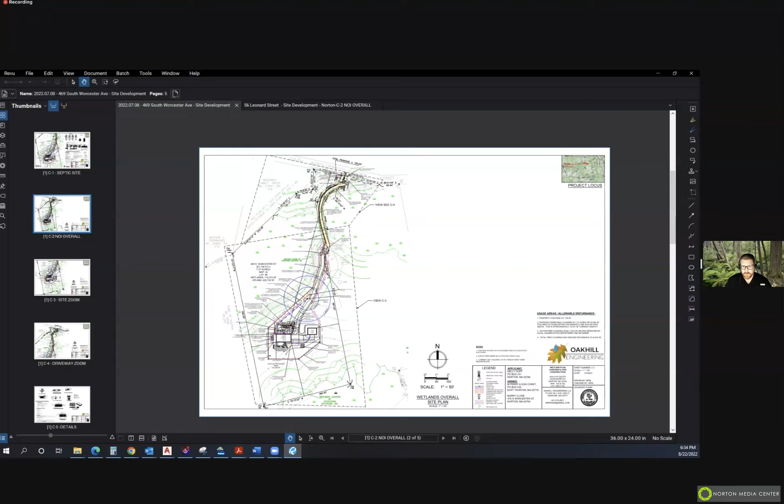Let me just comment, you certainly can participate as a member of the public. Oh yeah, definitely. So I think the idea of recusing from final votes is appropriate, but he has rights as a town citizen and member of the public. Right, so the proper procedure is to turn off your screen so you're not part of it as one of the members from the Conservation Commission voting. That's kind of what we've been directed to ask people on the board to do when they want to recuse themselves, to just turn off their screen. That's fine, I'm okay with that. I'll just listen in the background for when it's time to join the next one. Okay, all right, thank you. Thanks. Yep.

All right, John, I will share my screen. Yeah, you should have rights to do so. Okay, all right, can everyone see it?

Yes. All right, awesome. So this current property, it's approximately 7 acres. It was recently subdivided in May of 2022. The other property is 475 South Worcester. So let me zoom in so you guys can just see the site overview. So this parcel right here is 475.

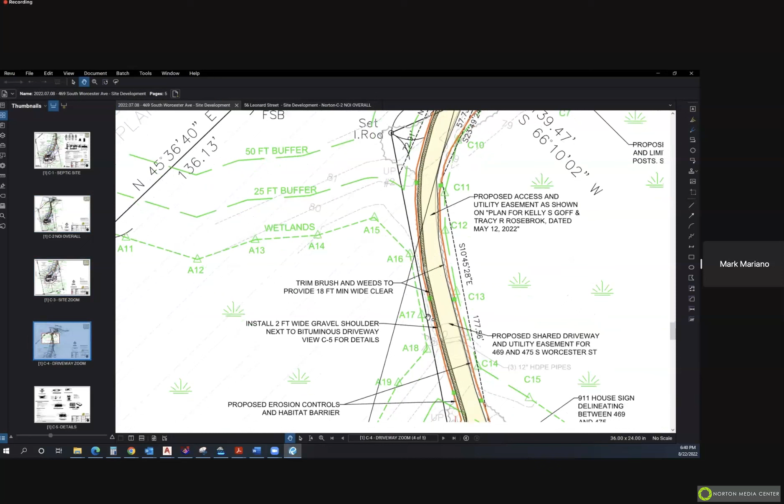Okay, and second, can you zoom in on the impacts within the 25-foot buffer that you want to do? Yes, okay, let me go to driveway zoom. All right, so the impact is this little edging right here. And we chose this side because this side was further away from the wetlands opposed to this side.

Right, I don't have any records of the original filing. I think it occurred, I want to say pre-95. Does that sound about right? Yeah, I can definitely look through other records.

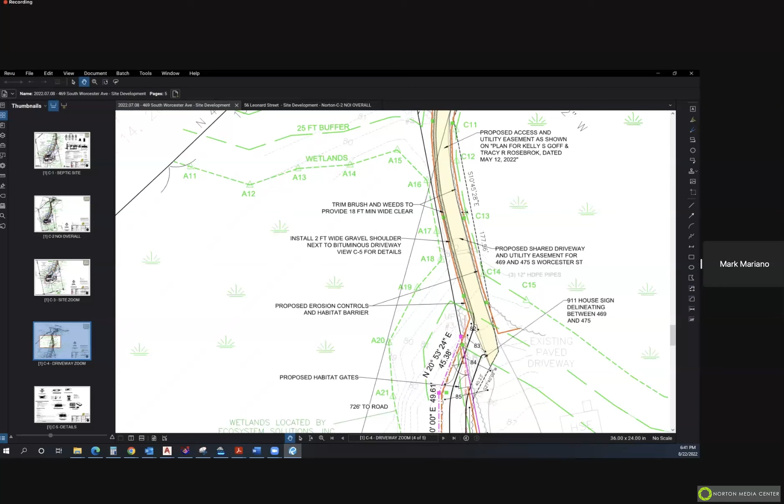Do you think that the three pipes there is sufficient, or do you need to extend the driveway in either direction further? So we have three culvert pipes that are right here. I believe I don't see the necessary need to alter or change those in any way. They are far enough out where we're not going to be impacting or filling over them. And I believe, like I said, I don't have the original filing, but likely they were just put in to hydraulically connect it, to keep that hydraulic connection. But yeah, I was just wondering if those pipes needed to be upgraded, or if the extension was going on either side further, that it would compromise those pipes.

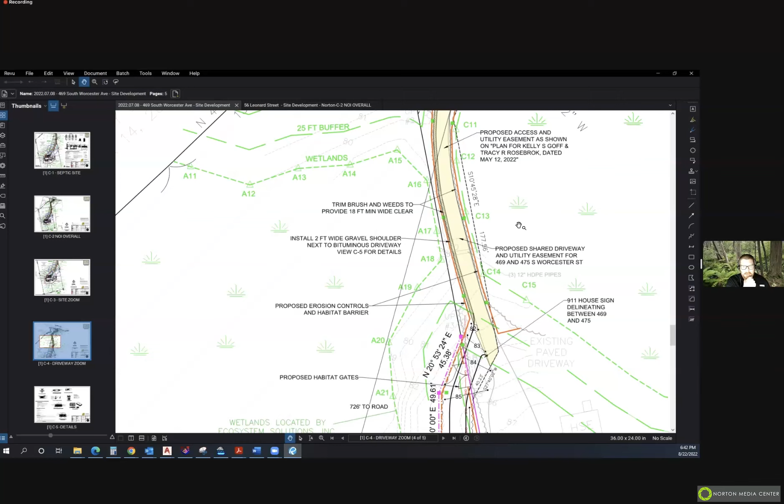So that was one of my other questions. And you were talking about the markers that are going in. Yeah, so those are going to be flush with the ground. Is that the plan? The stone markers?

No, I'm proposing iron rods. They'll be easier to find in the end, and they'll be easier to find with a metal detector. And that's a requirement from Natural Heritage? Is that what they requested? So they never actually requested it, but the last project I did two months ago, they did request it on that one. So I...

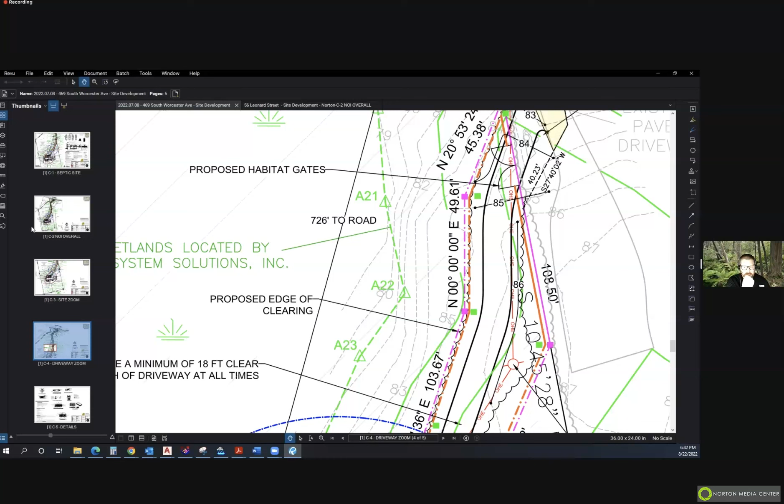Figured that was a similar thing they'd be looking for here. So for the commission, I think we'd also want a visual post at each of these markers. Oh yes, so the green post is your standard post, and the iron rod is just to...

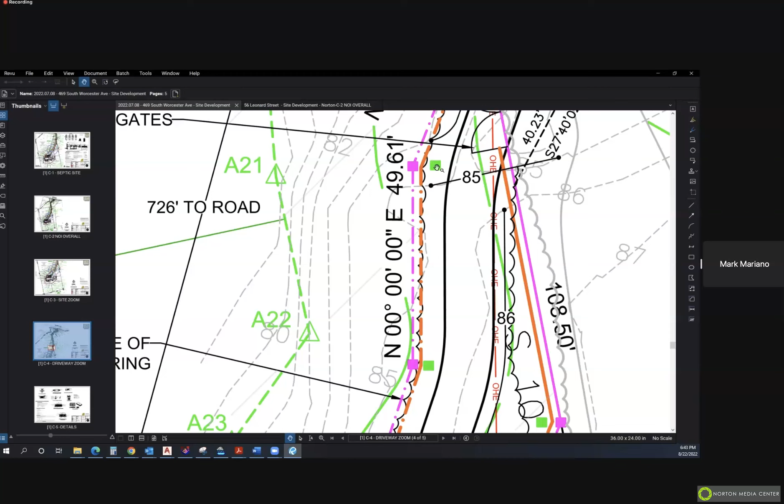Locate the limit of what Natural Heritage has approved for clearing. We still have your post, which is probably about 3 feet off of what the actual allowable clearing is inside of that, so you're at like the 28, 29 foot setback from the wetlands.

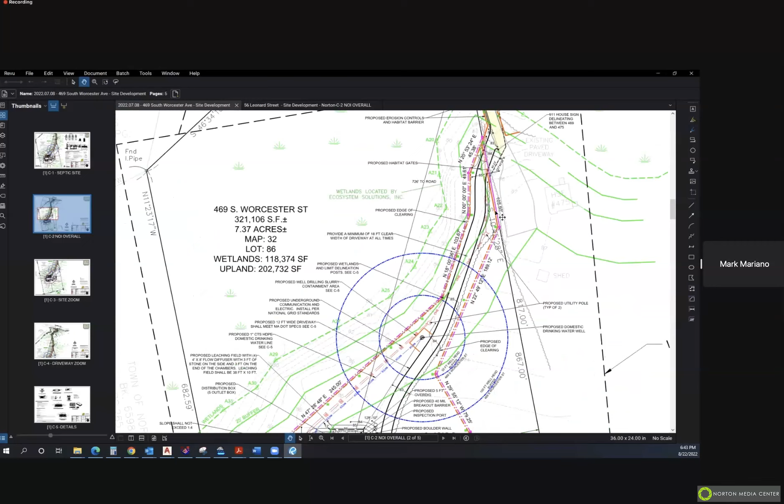So I have approximately 1, 2, 3, 4, 5, 6, 7... let me go back to this. 6, 7, 8, 9, 10, 11, 12, 13, 14, 15, 16, 17, 18. I have 18 posts with signs.

Yeah, and I have no issues with the delineation either. So EcoSystem Solutions, I didn't want to change any of their flags when I was out there.

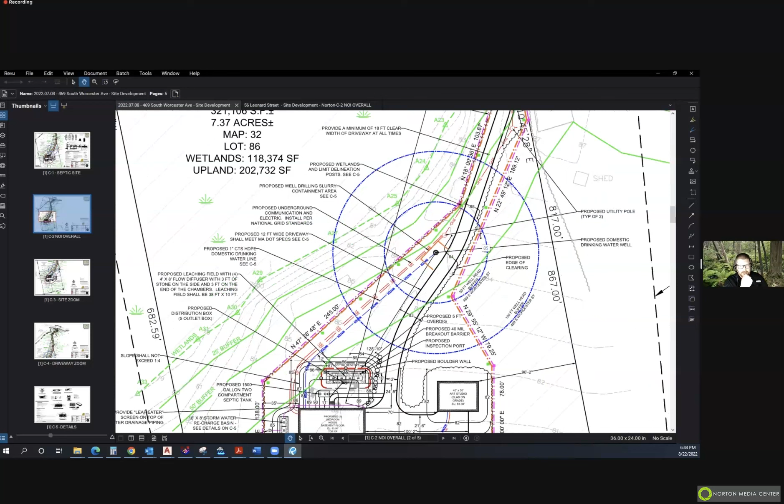So the last question I have is, are there any good stewardship practices the landowner wants to do with stormwater management, or how's the runoff going to work for the new impervious surface going in here? I know it's not required for the stormwater handbook for Massachusetts state, but under our local bylaw, because it's more than an acre, I was wondering if you guys had any ideas.

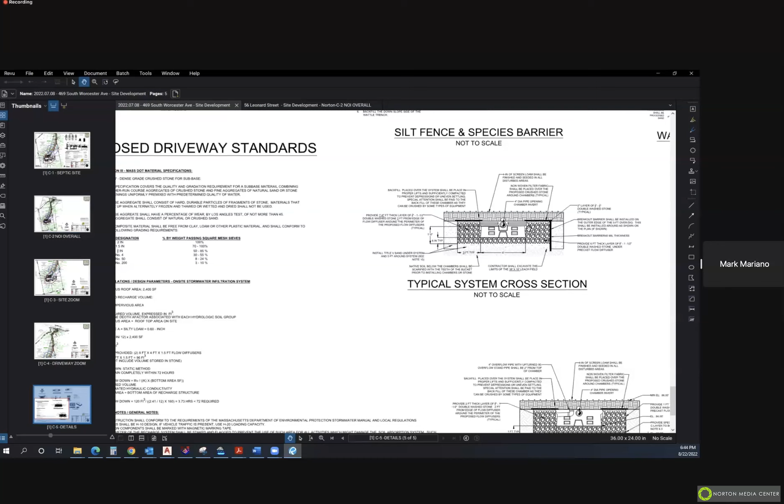Yep, so we incorporated a storm recharge basin here, so we'll collect all the rain water runoff and put it into here. We have a detail associated with that, it's stone with a chamber in it—sorry, it's this one. Because we did the test pits out there, we're able to put this at the correct elevation, so we maintain that minimum 2 foot of separation.

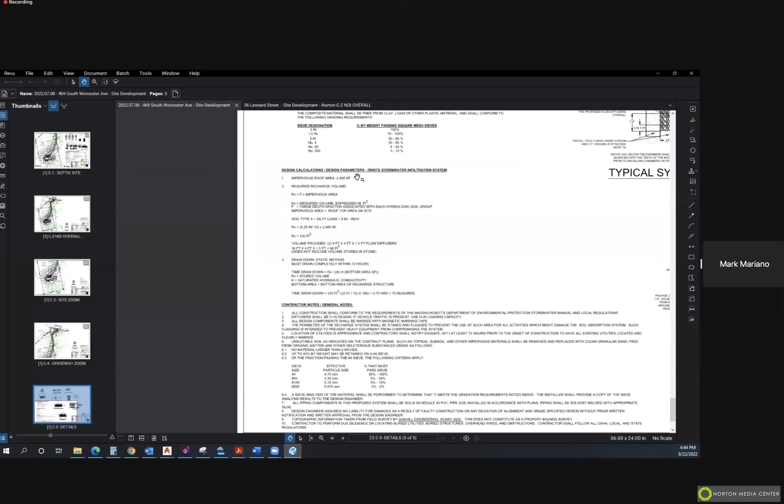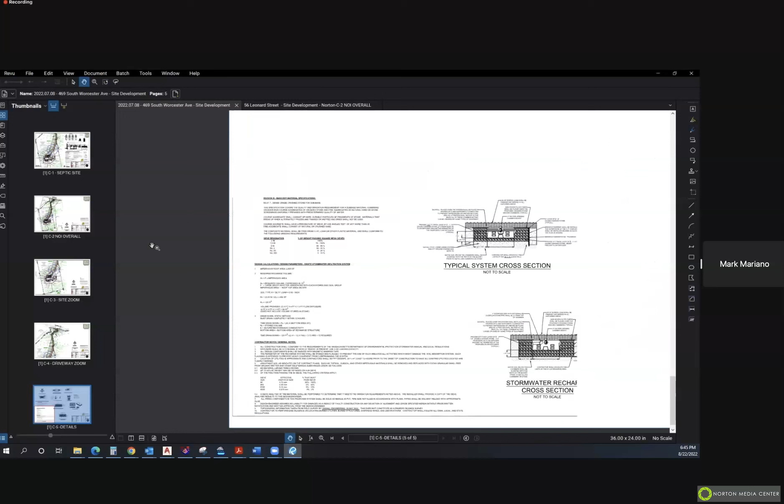We also did a quick drainage calc on the drawdown in the storage based on a 25-year storm. The other items that we are doing... that's the overall.

The site is relatively flat. We are grassing this, so it would be grass vegetation that can do some filtering before it reaches the wetlands. The existing impervious, because we're so tight here...

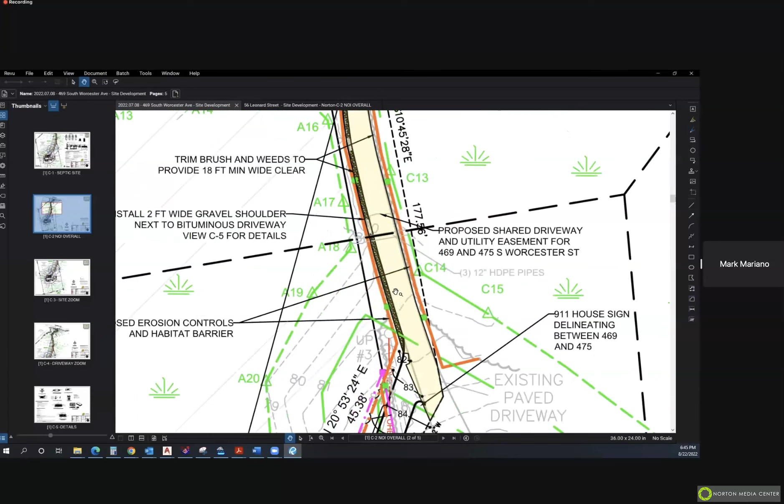I was just going to propose the gravel shoulder right here. That's something we could change to like a 3/4 inch crushed stone as well, which would help mitigate along a large section of that. But we still have to maintain Mass DOT capacity, so it would still be kind of compacted—it wouldn't be like a filter strip.

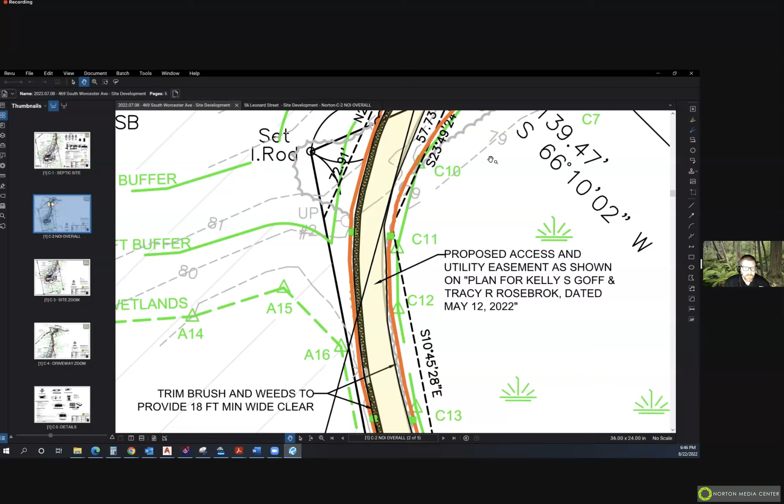Right, okay. Yeah, those were my main points. I think this is sufficient for what we'd be looking for in good stewardship practices on a single family house, given the level of disturbance—I think you've taken all the initiatives and steps to improve the setting for this site development. So I'm comfortable with this, but I'm going to defer to the commission if they have any other questions.

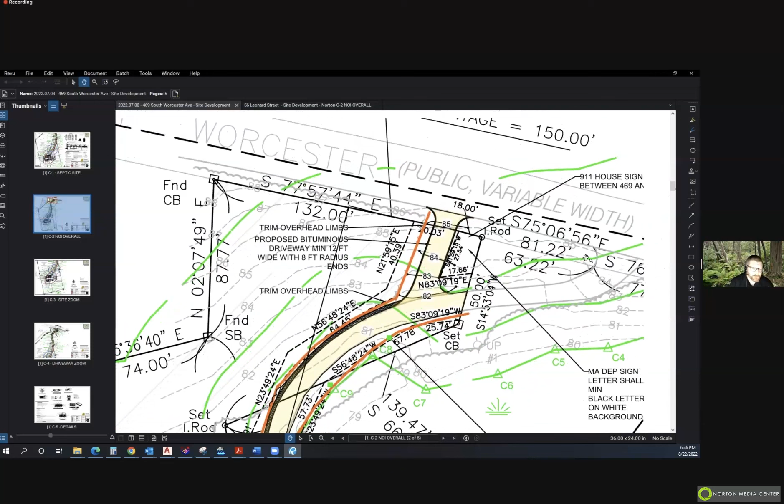I have a couple. With regard to the driveway where it meets South Worcester Street, it looks like it's being revised there—that section will be... this is the current section right here, and that will remain. However, because that falls onto 475 South Worcester, access wanted to be provided for this individual's house right here through this point, and it's actually an easier mode of accessing.

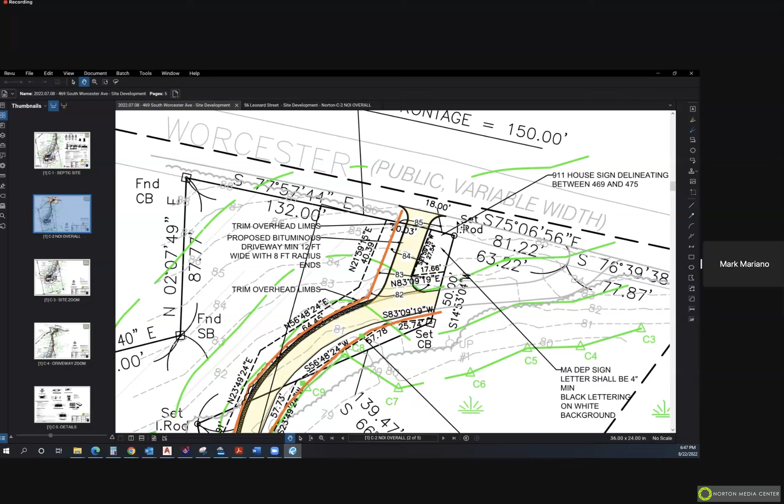This is kind of an odd tight corner, but it's very difficult to get in there with a truck, by the way, just so you know, as it currently is. So I think that access point would be a lot better—better visibility, and it has the advantage, it looks like it pulls it back a little further from the wetland, but...

It would have to go under the common driveway regulations, I'm assuming. Yes, we would have to file for a permit for that.

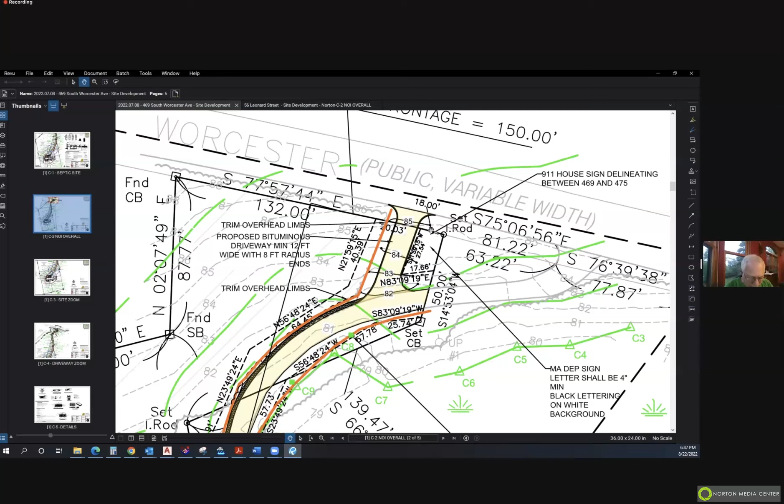All right, and then the zone around the well for the well installation—it looks like it's fairly flat, about the 50-foot mark from the edge of wetland. And in terms of the well installation activity itself, it has a containment area. I see, okay.

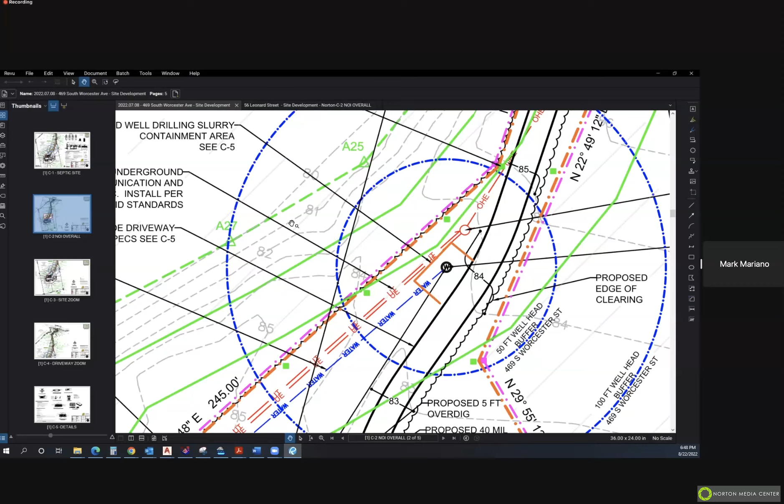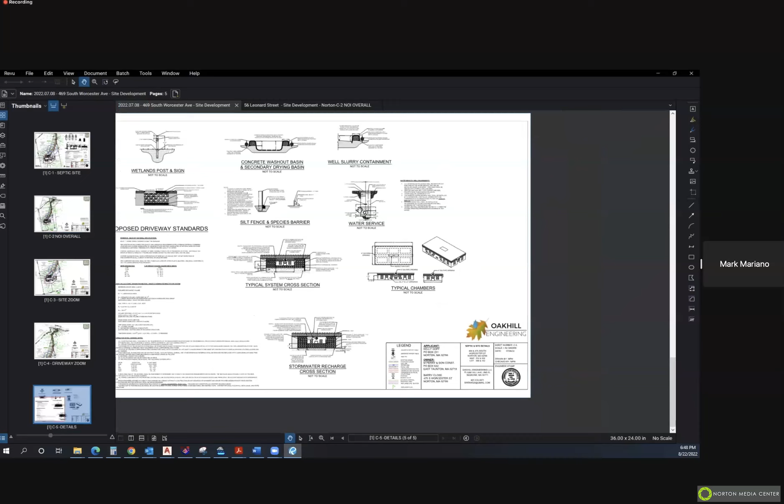Yes, so there is a slurry containment area. I believe I have a detail of it, where they actually dig it down and provide a berm around it, then protect it with a straw wattle. All right, so that's been addressed.

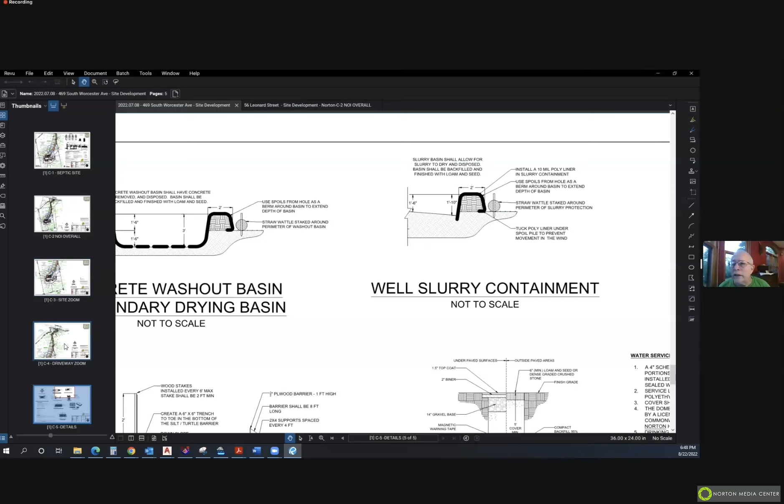All right, any other questions among commission members? And if there are none, I think we can open it up to the general public. And even though you're not acting as a commission member, Mark, you certainly have the right to ask any questions you might have at this point.

So I don't see any questions, and I think there were some outstanding issues that we have to require a continuation. We mentioned is it natural heritage, or is that?

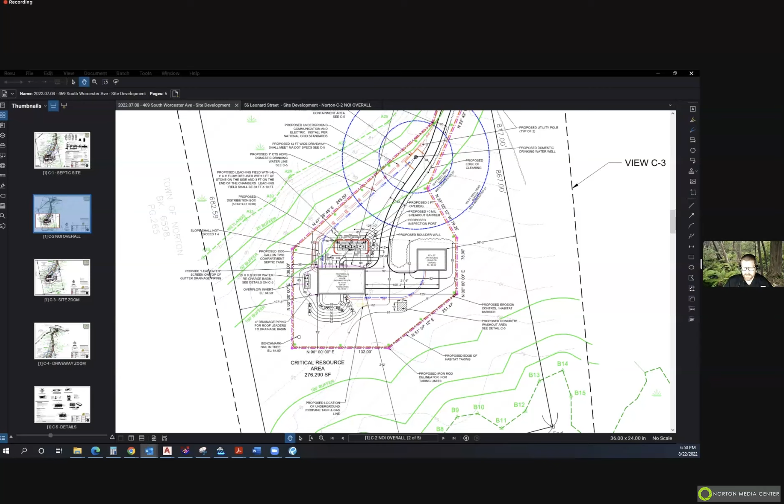Mark said that he received a letter that he's going to forward over to us. I don't have any issues with that. It was more so the issues of the work within the 25-foot no disturb zone. It looks like based on what he has discussed with us that there really isn't going to be much modification to the existing road, mostly the shoulder. And he went over the green infrastructure BMPs on the westerly side of the house that they're going to be implementing, in accordance with our local bylaw. So I think though all those issues have been addressed, we just need to get that letter, and if Mark can send that over, the commission can deliberate and discuss this in more detail.

Sure, I'll forward this over to you right now. I'm just pulling it up. So here's the filing. In the review, obviously the key points: Wetlands Protection Act, this will not adversely affect the actual resource area, and then MESA will not result in a prohibited take of the species.

Thank you, and that reminds me to email them and let them know we no longer use that email address. Thank you, no problem.

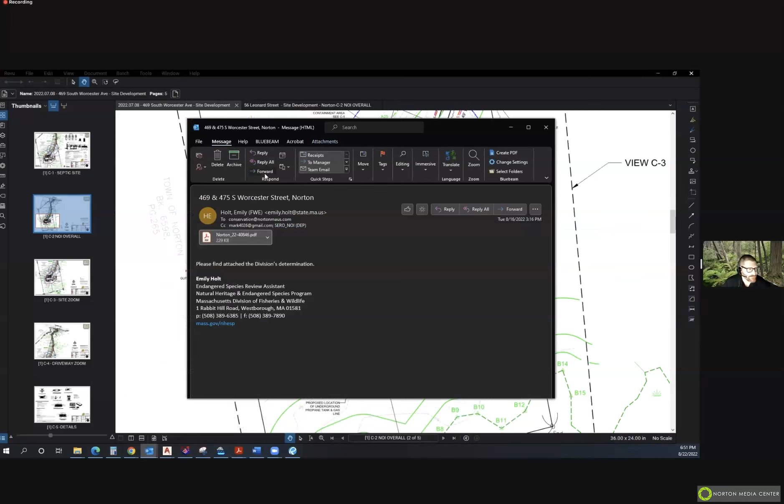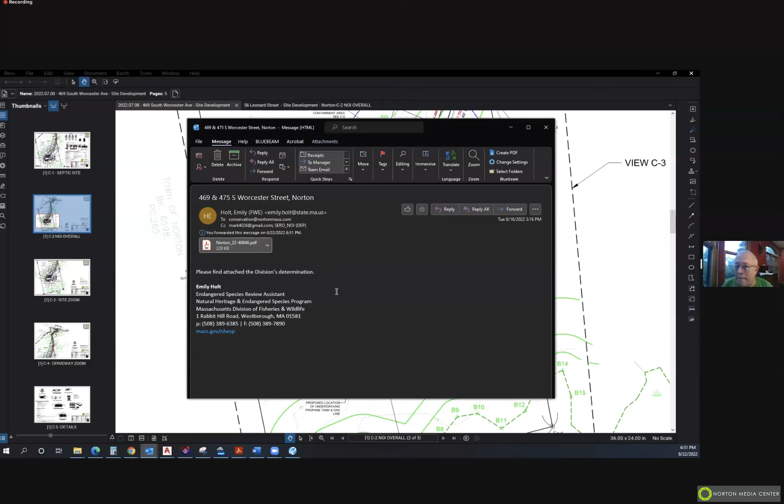And so that sounds like we can entertain a motion to close the public hearing for DEP file number 250-1110. Just a quick review, any further discussion or questions before we go ahead with such a motion? And if not, we can consider a motion to close.

I'll make a motion to close the public hearing. A motion made by Ron and seconded by? Second, seconded by Tama. So again, roll call vote required, beginning with Ron and Tama. Aye. Mark will be abstaining, and we have Carrie, and somewhere down there I think is Dan. Aye, aye. All right, and I'll throw in an aye. I might have missed somebody. Well, Mark is abstaining, that's right. So I think we got all six. All right, so the motion carries.

The hearing for file number 250-1110 is closed, and we have 21 days to issue an order of conditions. Our next meeting is September 12th, so chances are it will be at that time.

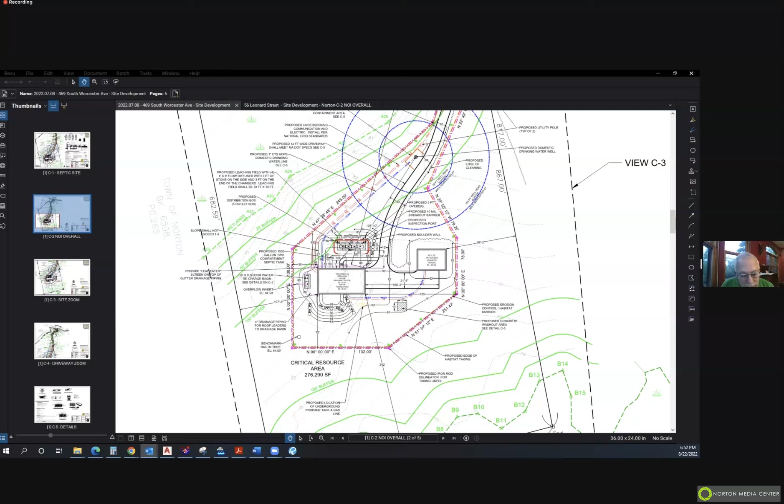Our next item on the new hearings agenda is DEP file number 250-1111, notice of intent for 56 Leonard Street, concerning proposed work for site clearing, ground disturbance, installation of a water line, overhead and underground utilities, driveway clearing, a Title V septic system, and a single family home. Do we have a representative for the applicant? Yes, my name is Mark Mariano with Oak Hill Engineering, 75 Oak Hill Ave, Seekonk, Mass.

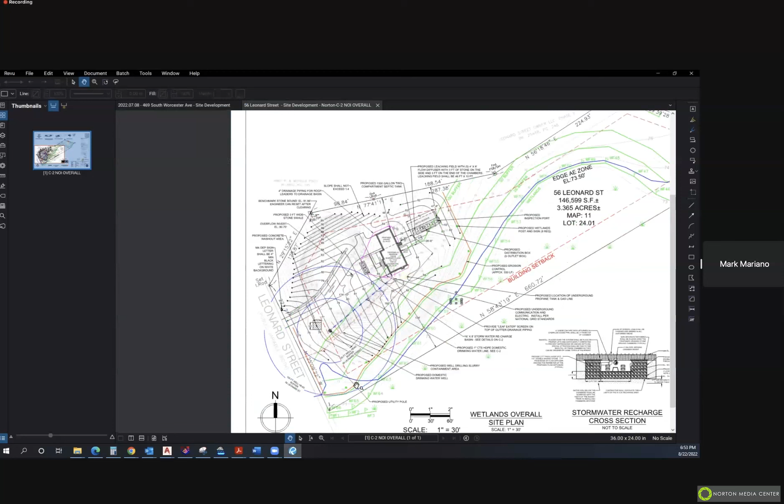Tonight I'm representing Bruin General Contracting for a single family home within 100 feet of a bordering vegetated wetlands. We had this property delineated in February of 2020, with the ANRAD approved in April of 2020, so the ANRAD and the wetland line have been verified. The proposed work includes a single family home within 100 feet of the wetlands. We have a little bit of the septic within 100 feet of the wetlands, and we've kept the well outside the 100-foot wetlands buffer. So we have a little bit of utility work that will occur within 100 feet of the wetlands.

The main thing on this project is because of the slopes and topography out here, there will be clearing that will occur within 100 feet up to the 25-foot buffer zone, just reshaping the ground as seen on the topography. The site will be protected with erosion controls circulating here and outside of the 100-foot buffer. The site will also have the proposed wetland signs, which we're showing 9 of here.

We are also working on some of the stormwater treatments, so we're showing a stormwater mitigation system right here, capturing the roof runoff and bringing it to a recharger. We are also adding a stone swale along the edge of the driveway to catch a lot of the runoff coming off this high embankment, at least slowing it down and allowing it to infiltrate into the ground. The material out here is good material, it's sand and gravel, so we're looking at good infiltration rates.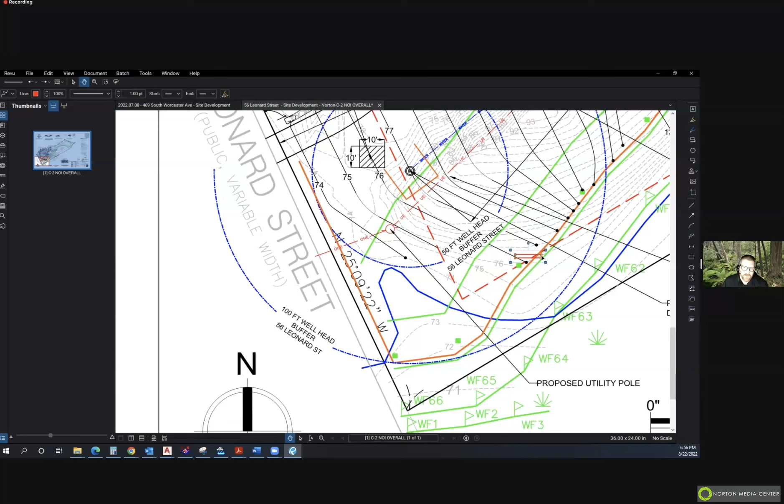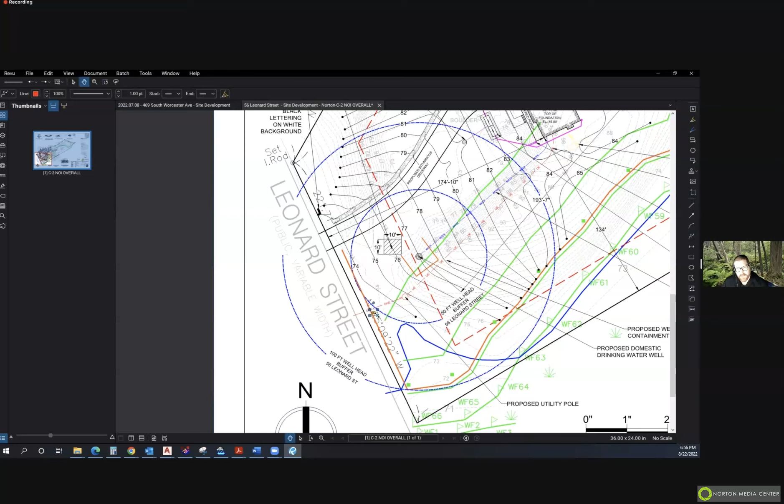And then secondly, the contours that you're shaping on that side slope there, they're heading towards Leonard Street. I don't know, I just have some reservations. On this side or this side? Southern portion. That area that's heading towards the wetlands there, that section right there. What's going to capture all the runoff from that area? Is there going to be anything, because I'm just a little concerned with that area.

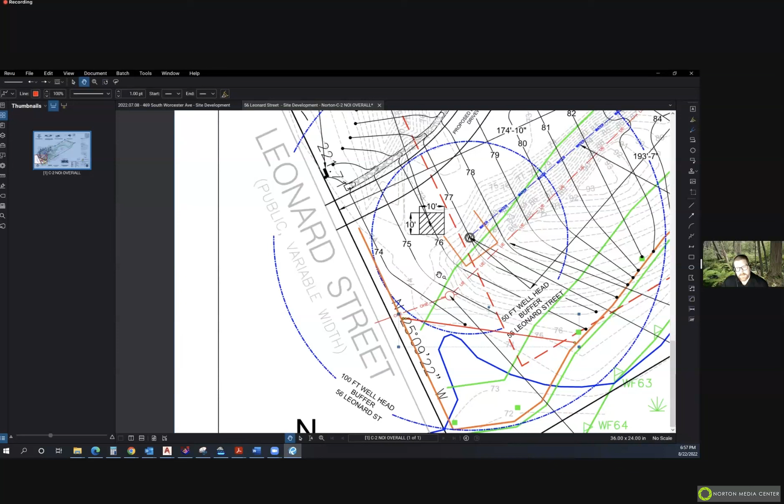Okay. You're concerned about the sheeting that's going to come from this area now? Yeah. Okay, it's something we can incorporate some sort of depression to slow it down. I'll take a look at it, see what we can do to kind of minimize the runoff potential and let the water kind of either infiltrate or have some sort of practice in place. But obviously, bring that limit of work outside the floodplain.

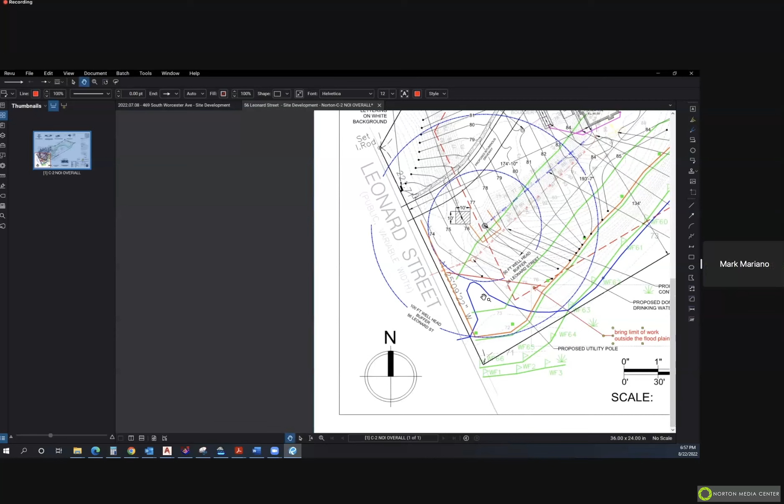I think that's definitely going to be something you're going to need to do. Otherwise, we're going to have a different discussion. No, that seems reasonable. It's really nothing to do in the yard right there, so we can bring it back. Okay, those are my main concerns.

I mean, I looked at this one. There's going to be extensive grading on site, but as long as you've got all the practices in place during construction, I really don't have any major concerns with it. You've got a SWPPP, you've got everything in accordance with our local bylaw. So I think you're in good standing for those.

You all set, John? Yeah, I'm all set. Go ahead, Julian.

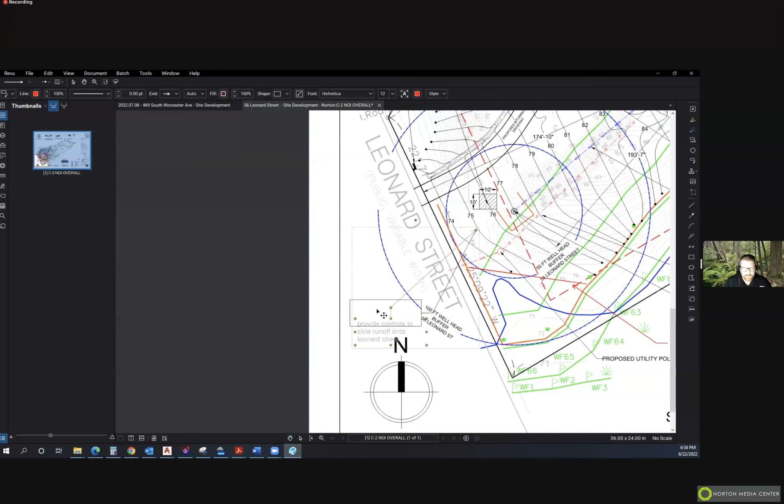So the whole upland site is, well, I guess the whole site is 3.36 acres, but you're totally clearing about 2 acres, would you say, or maybe not quite that much? No. So the amount of clearing, this is the amount that's currently cleared. Oh, so there are no trees in this area now. Is that correct? In this area that I just showed...

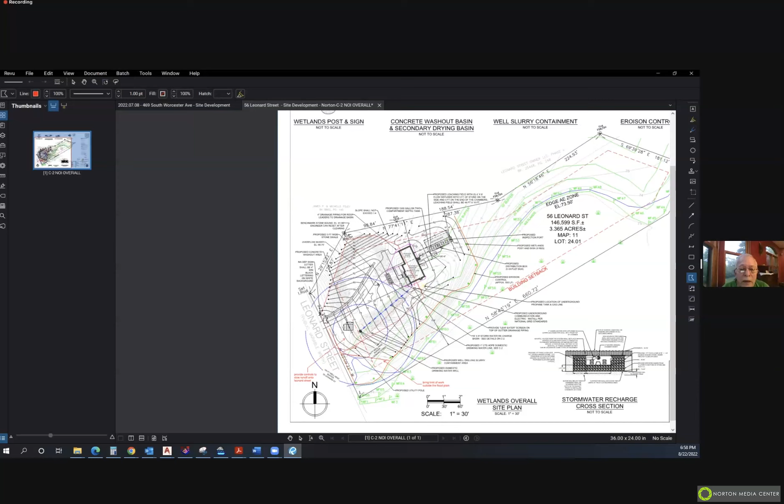Let me do this again. Well, actually, I don't know if it matters if there are trees there or not, but when I look at the shape, the final shape, you're assuming that the entire area outside of the house is grassed, that you have this rather substantial grassed dome. I'm not a professional here, so I'm just speaking from how it looks to me from my experience on the commission and runoff off of a grassed surface. So you have the potential, with heavy rain, for an awful lot of runoff coming off this site, totally unobstructed, without any kind of swales or any kind of structures to intercept it.

And you have the stone - I'm going to use the term sluiceway, it may not be a fair term - but you have that stone swale, and it comes down to Leonard Street. Maybe I'm misunderstanding, but does Leonard Street, it's still below the driveway, is that correct? That is correct, yeah. So we're at elevation 85, and down here we're at 74.

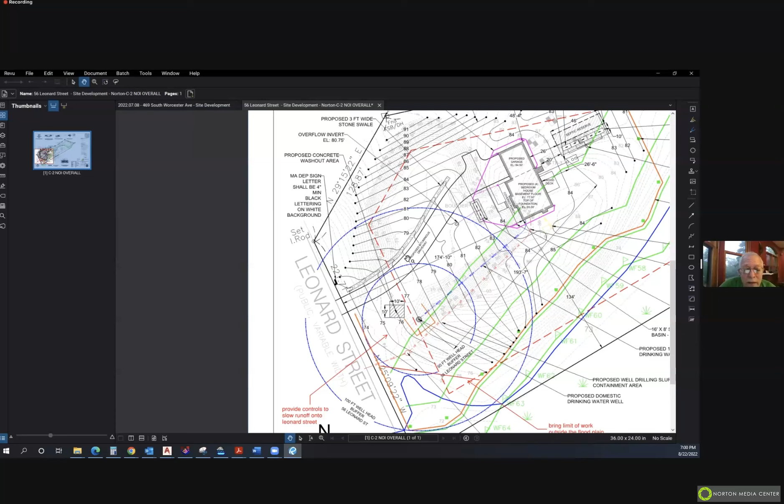So the way I see it is, in heavy rain events, I see the potential for an awful lot of water being shed directly onto Leonard Street, which during the winter time, first of all, I don't think the highway department is going to look favorably upon that, and it's going to be an incredible hazard during the winter time when it might rain and then freeze, and you have a big swath of Leonard Street icing over.

So when I looked at it, I saw the potential for a somewhat more creative grading, with potential for some weirs being put in your stone swale that would potentially periodically divert some of that water off to the side into infiltration structures of some sort. And with regard to the big area between the house and, let's say, the well, you could have sort of gentle terraces that would have the potential for little isolated landscaping areas that could be kind of private sitting areas and so on, and it would address the potential for tremendous runoff.

And I don't know if that's something - and I know this is outside of the direct - what's in the Wetlands Protection Act, particularly for a single family home.

But I just think the way this is designed, it's going to be a problem for the future homeowner. Is there a homeowner involved with this, or is it just currently being constructed and then will be sold? Constructed and sold.

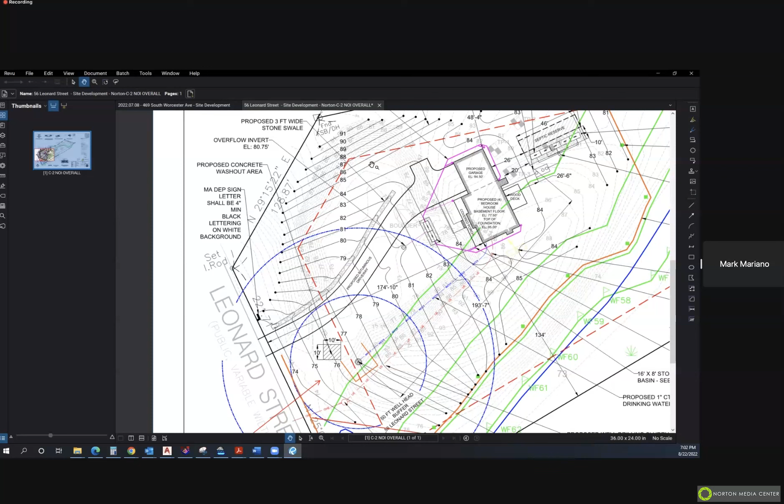So we tried to space them out as much as possible. This is a natural feature we're just trying to address, and these slopes I think are 1 to 5 up in this area, then 1 to 6 and 1 to 8 as we come down. The idea of the check dams you brought up is a good idea, and I think that's what we'll incorporate to slow a lot of the velocity coming off of this.

One thought is it's not just about slowing the velocity, it's doing something to reduce the volume, because during moderate rain events it wouldn't make a difference. But we have this increasing rate of extreme weather events.

It'll get it away from the house, but it's going to put it at the bottom of the driveway and onto Leonard Street. I think it's a future problem for whoever owns that property that will have to be addressed, and I think now, with a little bit of redesign, is the time to make it possible, since it's probably going to need work in the future anyway with the current total contours and no interception of the flow.

But you understand what I'm saying about some creative terracing? Yeah, I understand the terracing. The only thing I have thoughts on for the terracing is the future maintenance of the terrace itself, because I wasn't projecting this whole area to be lawns. It would have some low ground cover or something a little more stable than a lawn. But it's something we could probably put in, like two terraces somewhere, starting at 88, trying to work some of these grades back. It's just we're getting up to the existing property line here.

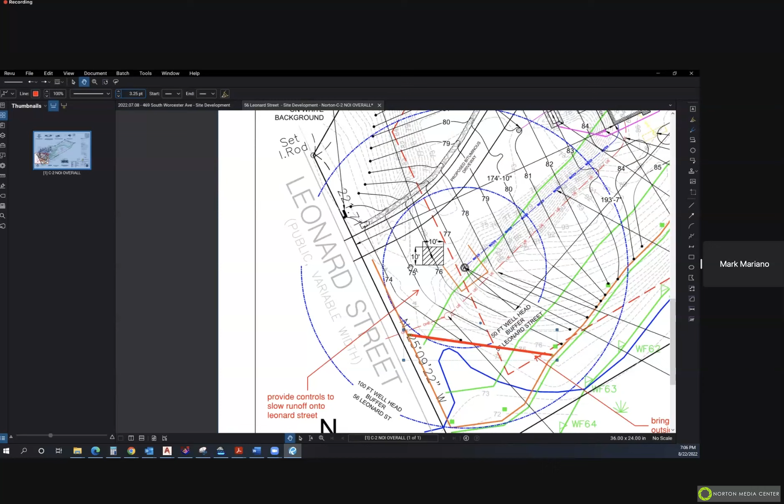All right, I'm all set with that, but I think down by the street, the way it's designed now, it's going to be a potential hazard during the winter. To John's point, we can incorporate something down here, and maybe try to get some of this flow to come into a rain garden or something in this area. Yeah, I'd say something green infrastructure at that location would be awesome, Mark. Yeah, and maybe tie it to the gravel system you have associated with the driveway. Maybe have an underpass under the driveway feeding into that rain garden.

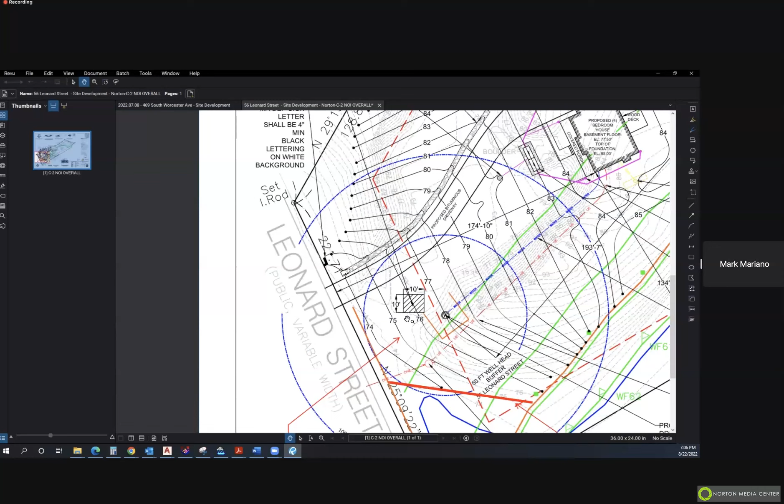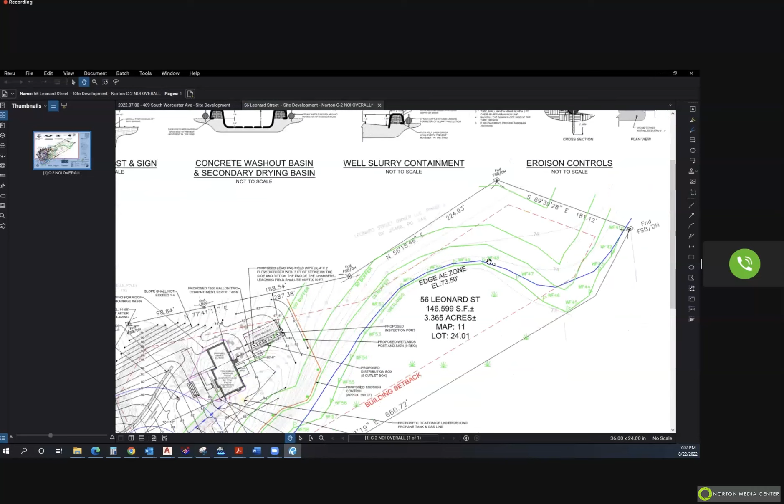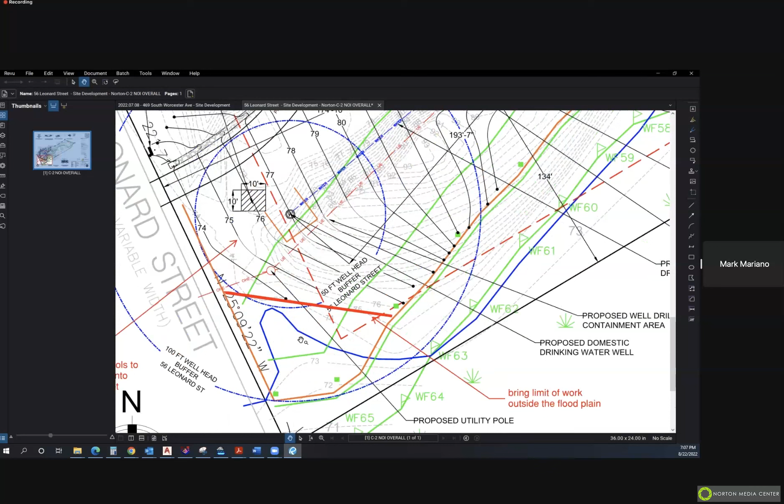Okay, questions among other members of the commission? I have a question, which hopefully isn't too dumb, and also a comment. My question is, how do we know, or where is it noted, that this is within the floodplain? Oh, right here, so the blue line represents the AE zone. Are you asking? So none of the project is within the floodplain, but there's a heavy blue line right here that indicates there's this little nub that comes out. Okay, I see, I misunderstood. Thank you, okay.

Also, just for your own info, I think over the northeast part of the plan, erosion is spelled wrong.

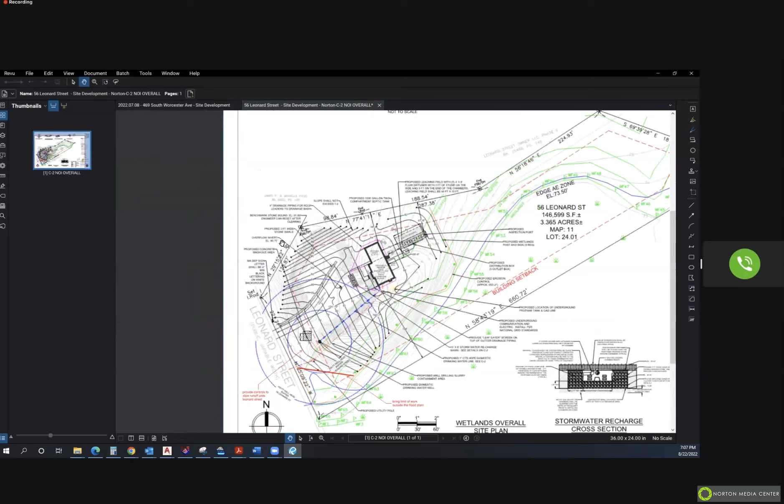I wouldn't put that past myself on that, if I'm looking at the right part of the plan.

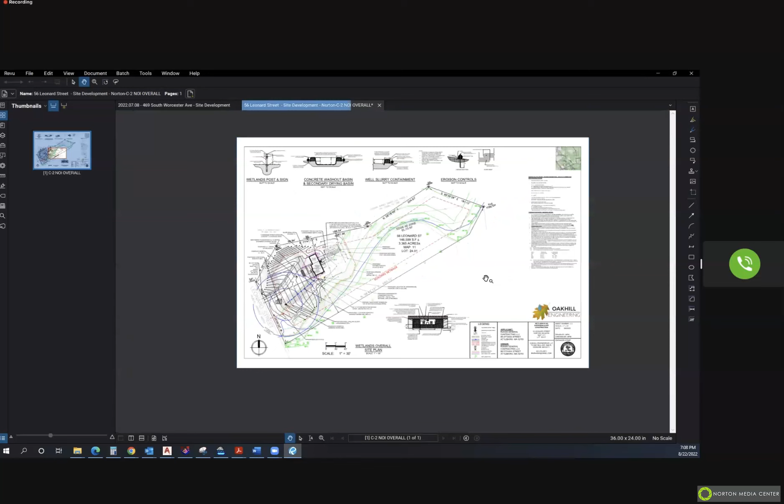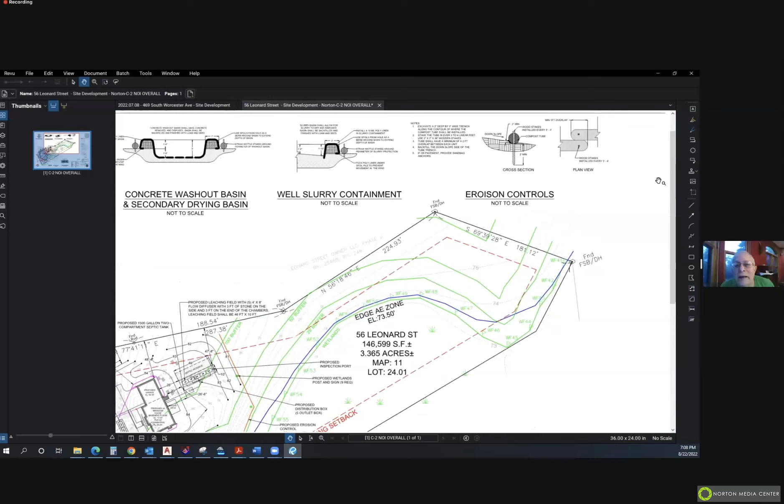Yeah, I don't think there's a word search function in AutoCAD. Is there? Oh, well, I don't know. No, you found it there. It's up there, yeah. But okay, we I just admit, and those Eroison controls are not to scale. So at any rate...

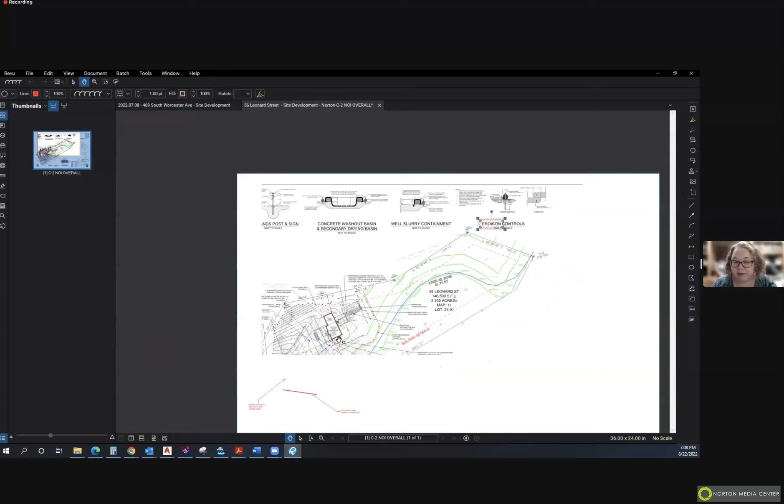Any other questions among commission members? Go ahead, this is Carrie. Carrie, yes, I just wanted to say I would echo what has already been said by John and Julian. I have kind of a newbie question: what is the concrete washout area and what is it used for? I always see these on our plans.

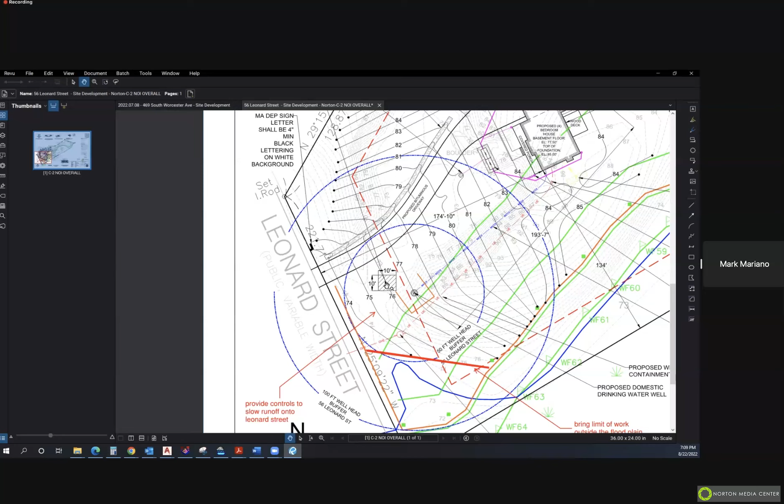When the concrete truck comes to pour the foundation, the floor, and the slab, you give them a dedicated place where they're not washing it into the wetlands. Thank you, no problem. Thank you for putting it on the plans, Mark, I appreciate it.

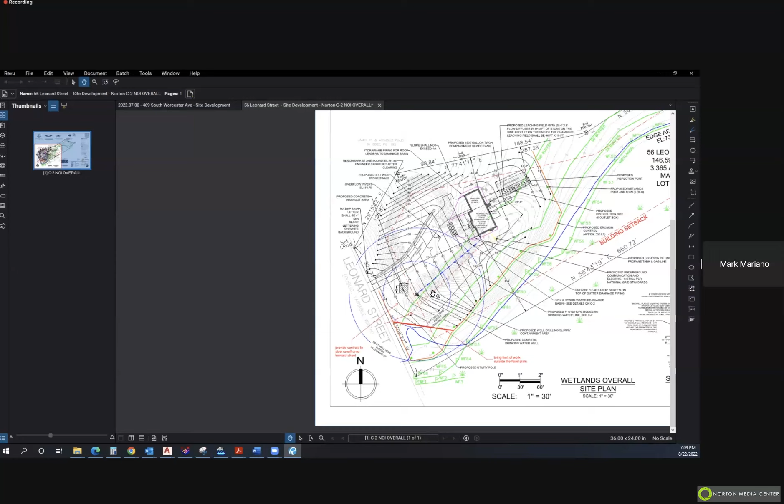Oh, if Lisa were here, he would have had to put that on the plan if it weren't there. I assure you, that detail never gets missed. That's a standard on all of our plans, and all the surrounding towns do always ask for it.

So I'm going to open it up to anybody attending, having a question, and that includes any commission members who want to ask a question they haven't already. So I don't see hands, or you can also just take your mic off mute and ask your question.

But I think this requires continuation to address some of the concerns, particularly with the end of the driveway where it meets Leonard Street, to try to minimize any chance of runoff directly onto Leonard Street.

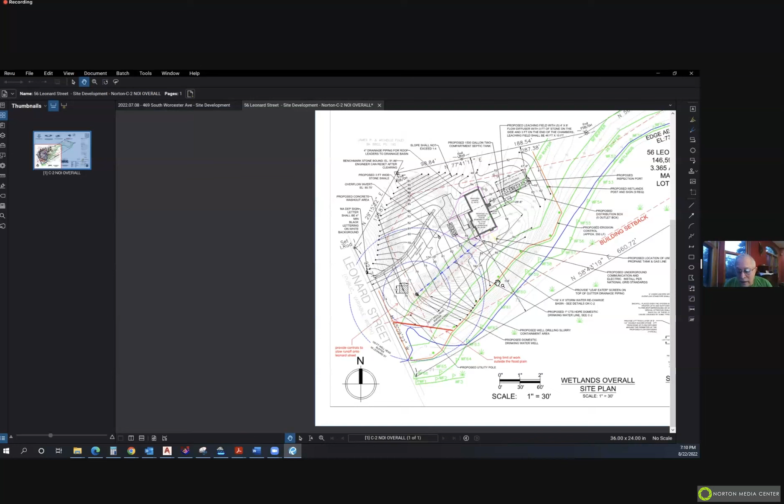So our next meeting is September 12th. Is that an adequate time for making any changes? Yes. All right, and so unless there are further questions or discussion, we can consider a motion to continue this hearing until September 12th.

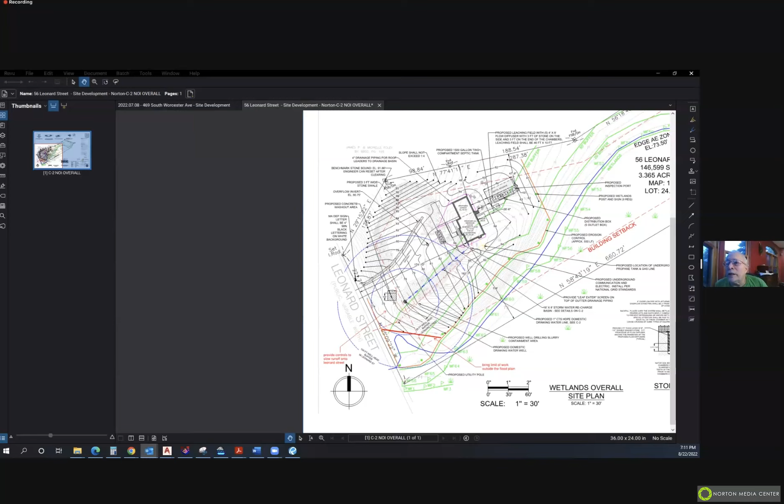Mr. Chairman, this is Dan. I'll make a motion to continue DEP 250-1111 to the September 12th, 2022 meeting. Motion made by Dan, seconded by? Second, I'm going to give it to Ron. I think you got it by a millisecond there. Seconded by Ron. So again, a roll call vote, beginning with Tama and Mark.

Aye. Tom, I think you're on mute. Yeah, but I saw an aye there. Okay, all right, so we got an aye from Mark and Tama, and now Carrie and Ron. Aye. Aye. And then Dan is out there somewhere. Aye, I am. Okay, yes. And I will throw in an aye, so the motion carries.

So Mark, we will see you on September 12th. Thank you.

Thank you. Our next hearing is notice of intent, file number 250-1109, concerning 120 to 116 Mansfield Avenue, the site of the future new senior center. The work will consist of demolishing existing residential structures on the property and all of the design components required for installation of a new senior center.

Do we have a representative of the applicant? Yes, you do. How are you this evening? I am good, go ahead please. Good, thank you. This is Scott Hobson from VHB in Providence, and I'm a biologist with the firm. With me tonight is Scott Lindgren, he's the civil engineering lead for the project, also from VHB in Providence.

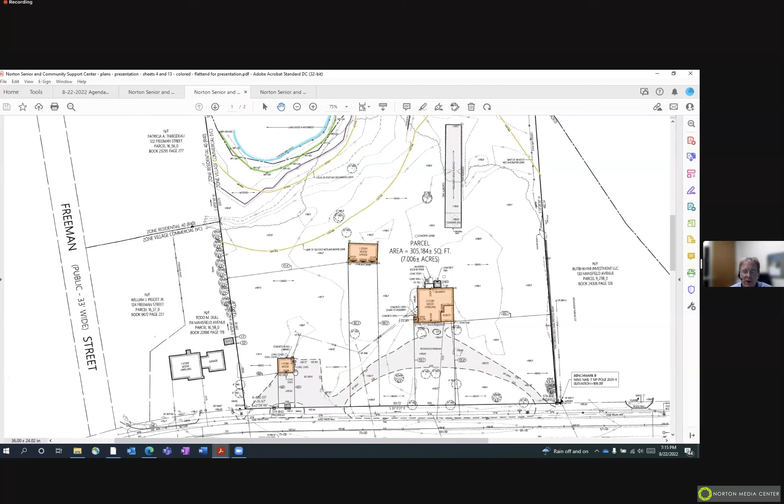The site currently hosts a single-family residence and 2 outbuildings, which would be demolished as part of the proposed project. There's some sort of rectangular concrete structure here that would also be demolished, along with the impervious existing driveways associated with this, shown in gray.

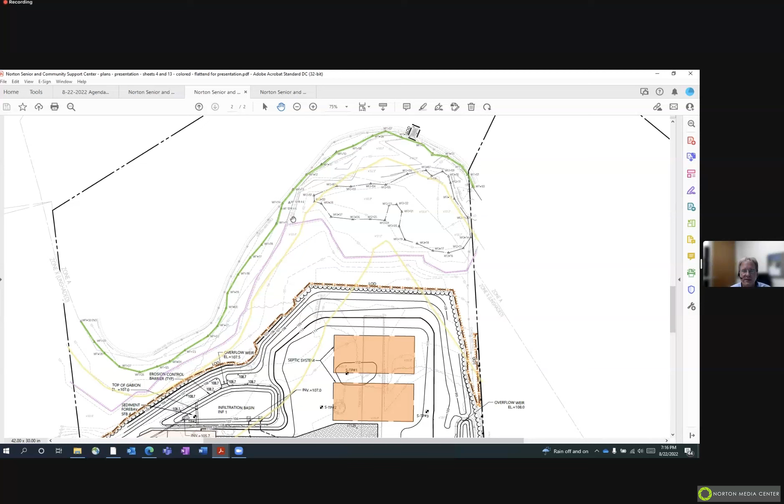Kicking over to the proposed project, we have the same color scheme here for the wetland areas. Instead of delineating the berm for floodplain, we simply cut across here for description purposes. The proposed project is just shy of a 12,000 square foot footprint building, sited where you can see the former residence just under that shaded area — so this would be approximately centered on the parcel.

Shown in green here are 2 proposed sanitary sewage leaching fields that would serve this new center. Very importantly, you can see the limits of disturbance here in orange. All project activities would be upland of the commission's 25-foot no disturbance zone, and the structures proper would be outside of the 100-foot buffer zone.

I'll be very brief with stormwater. It has been peer reviewed — we've received comments, addressed those, and submitted them to the commission today. There will be some plan revisions, and since we're going to the planning board next Tuesday, we're proposing to hold off on any final plan revisions until we get through the planning board and may have other comments and revisions on that plan. The intention would be to submit back to the town one complete set that would include all the revisions from the commission and the planning board, if any.

Stormwater-wise, it's been designed in compliance with the Massachusetts Stormwater Handbook. Roof leaders will be directed to rain gardens here — I should backtrack a little. This tannish color is the proposed impervious surface for 2 driveways and associated parking areas, so part of this paved area would go to this rain garden.

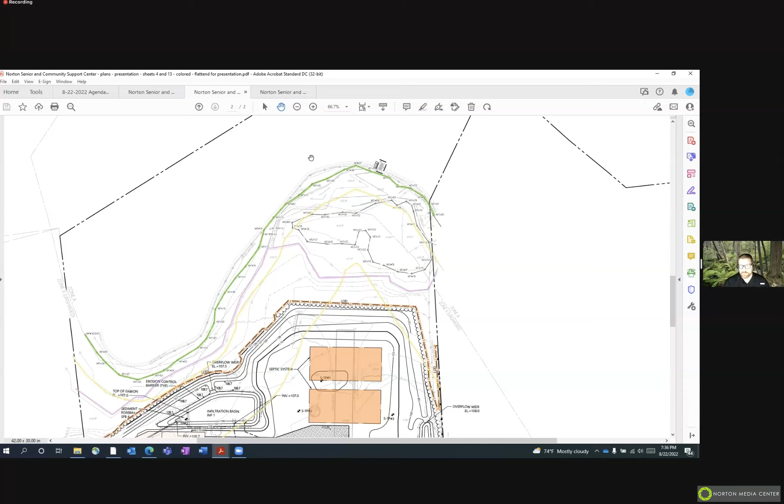All direct abutters to the Norton Reservoir and Lake Winnecunnet should be notified of the upcoming treatment for the ponds scheduled for August 29th. You should be receiving those notices tomorrow or the next day if you're a direct abutter; if not, please let me know. Any further questions concerning this project? It needs additional information, so we will be continuing until September 12th, I believe.

John, you would need to review our response to the peer review before this hearing could be closed. I'd have to take a look at that, and then look at the responses to see how they line up. Typically what I like to see in the peer review is confirmation that standard 1 is complete, standard 2 is complete, standard 3 is complete. That way I know everything's complete and the peer reviewers are comfortable. Any plan changes get made into a final plan, that plan gets submitted to the commission, and then hopefully by the next meeting we'll be able to close this and potentially issue an order of conditions.

Okay. Yep. Very good.

If there are no further questions or comments, we can consider a motion to continue until September 12th. So moved. You have a motion for continuation of file number 250-1109 until September 12th, made by Ron.

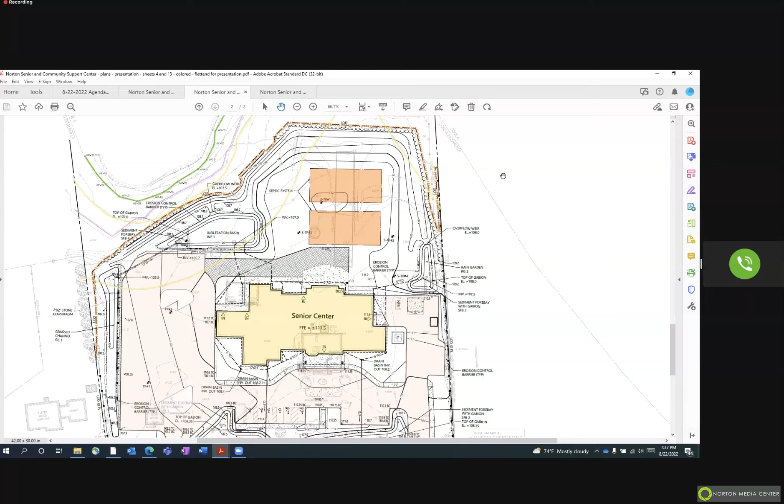Any second? Second, I think Dan got the second. So we'll do a roll call vote as required, beginning with Tama and Carrie. Aye. Aye. Mark and Ron. Aye. Aye. And Dan. Aye. And I'll throw in an aye.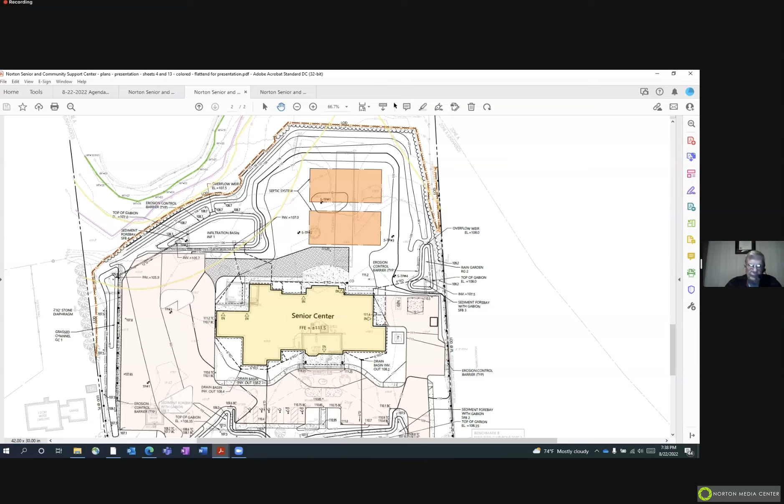The motion carries. So we'll see at least one of you guys next time. Sounds good, thank you very much. Good, appreciate it, thank you all. Have a good night.

Our next item is determination number 1127, request for determination of applicability for 16 Young Avenue. It's a proposed plan to add an addition to an existing family house. Do we have a representative of the project?

Yes, hello, this is Craig Siganowski of Rim Engineering, representing the owners, Joshua Nolan, who is also online tonight. Craig, you're all set with screen sharing capabilities. Okay, thank you.

So this project is just a small house addition to the existing single family one-story house, a one-story addition, 252 square feet. It's located on the westerly side of the existing house, in the existing lawn area.

The resource area was flagged by John Thomas for the client. We located that, as well as across the street a portion of the Norton Reservoir. It cuts through a stream under Young Avenue, comes around to the south and east of this property. We located the bank in several areas and plotted the 200-foot riparian zone. It's outside of the lot on the east side, and cuts in more or less through the 100-foot buffer zone from the BVW to the south. So none of the work is within the riverfront area.

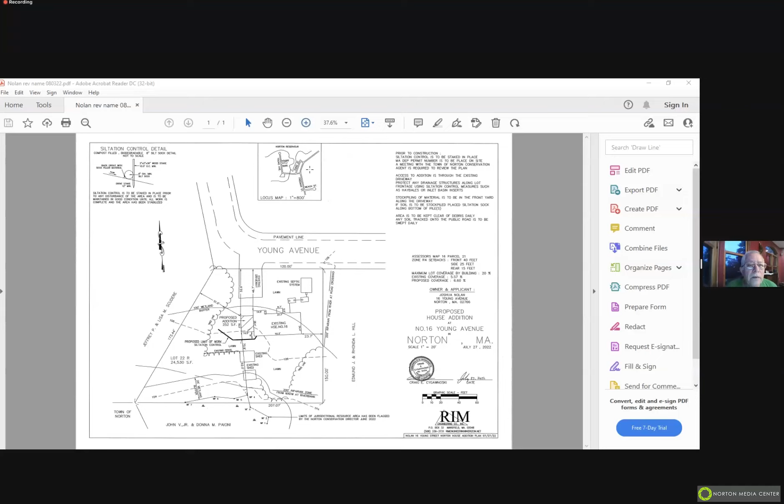Craig, if you could blow up the plan a little bit. Sure. So these are the two sheds pre-existing to the purchase of the property by my client. This area here has an existing fence that is the limit of, I think, a garden - it was a bit overgrown the last time I was out there. The tree line runs along the east side to the south, along the sheds, and then all the land to the west side is existing vegetation, a wooded area that's going to remain as it is.

So the access is directly off the existing paved driveway. Siltation control at the back of the house, about 8 feet behind the proposed addition, enough room to dig the footings for the addition. It is an existing lawn area, and when they're done, they'll just regrade it as it currently is.

All right, does the commission have any questions? John, do you have any comments? I mean, it looks fairly straightforward. Yeah, I didn't have any main comments.

Obviously, my typical concern is roof runoff attenuation - are you going to do downspouts, or are you going to do dry wells? What were you thinking about doing, Craig? Well, we could put a dry well in off the roof water. Okay.

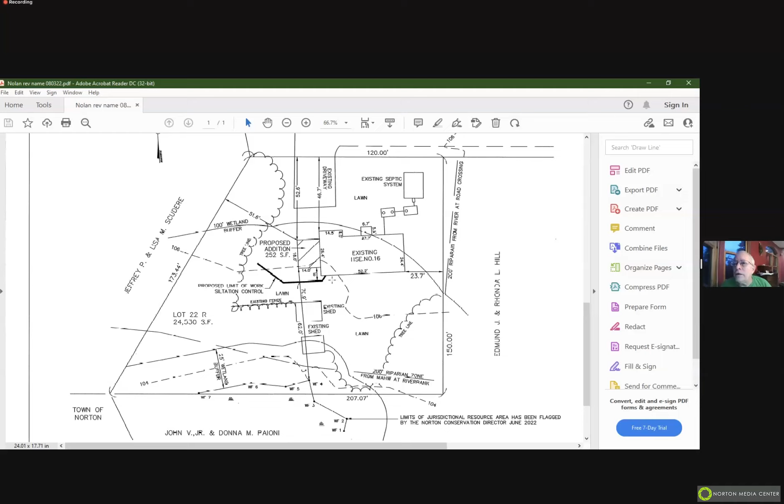Roll call vote, beginning with Mark and Tama. Aye. And then we have Ron and Carrie. Aye. And Dan. Aye. And I'll throw in an aye. So the motion carries.

If someone wants to offer a quick motion for a negative determination, we can do that now, or we can save it for later in the meeting.

So moved. We have a motion made by Ron for a negative 3, stating that filing a regular notice will not be required, assuming the project is carried out according to plan, and it is seconded by Tama.

Roll call vote, beginning with Ron and Mark, Aye. Aye. And Tama and Carrie, Aye.

Aye. And Dan, Aye. And I'll throw in an aye as well. So the motion carries. It's a negative determination.

So that gets issued in a couple of days, or is there an appeal period with a negative determination? We can have that in a couple days.

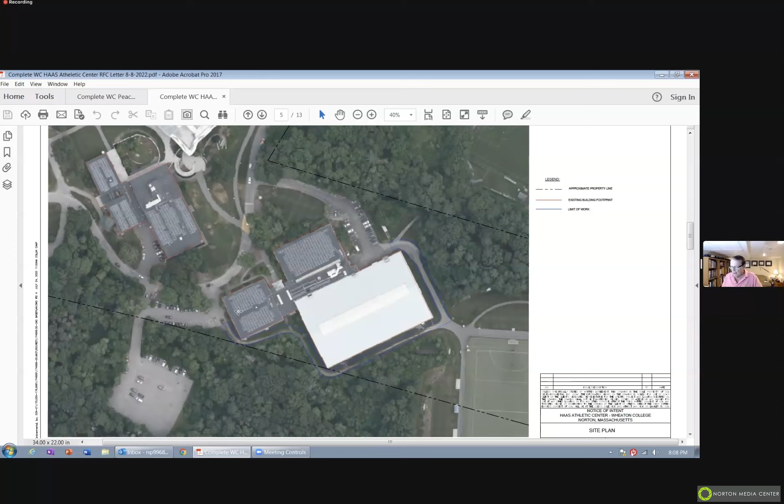Let me scroll up a little bit here. So you can see the Haas Athletic Center, and that blue line running around the building is the area where the asphalt walkway was improved. It was cracking, it was damaged, it really wasn't in good shape. So the work scope included repairing that, putting in a new asphalt cover, and putting in a plastic geotextile grid on each side of the walkway just to help with erosion control, and then putting some crushed stone around each side of the walkway.

It's detailed a little bit better here. You can see the brown dotted white line - that's the asphalted area that was repaired. And you can see the various zones here, the 100-foot buffer zone in the dotted blue line, the 25-foot no disturb zone in the blue line, and the wetland boundary in the green line.

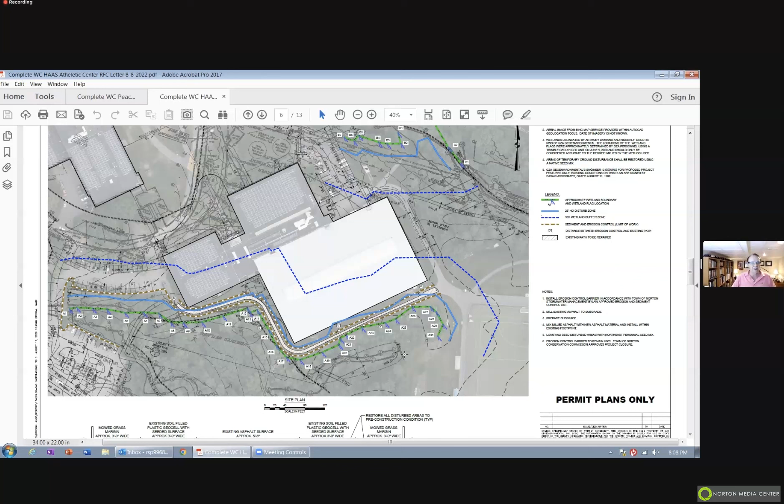The work was completed pretty much exactly as shown here on the plan and in conformance with the order of conditions. I have some photographs I can show you of what it actually looks like now.

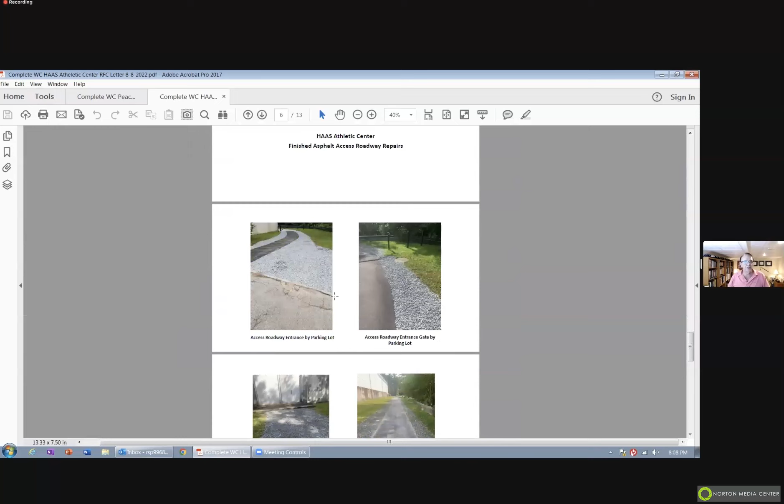So you can see the asphalted walkway here that's been improved, by the entrance to the parking lot. And you can see the crushed stone basically on both sides here. On the south face of the building, this is a long walkway in the back, and you can see the asphalt cover, the new cover that was put down, the crushed stone on each side of it. What you can't see is the geogrid, which is underneath the crushed stone. That was there just to stabilize the sides a little bit better.

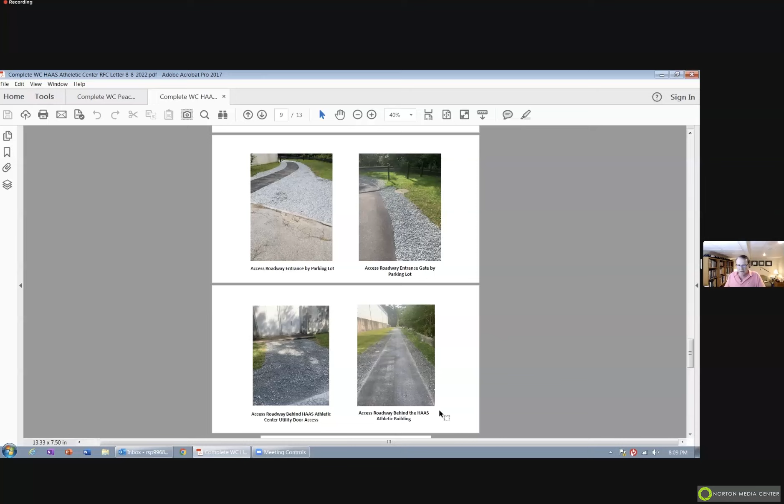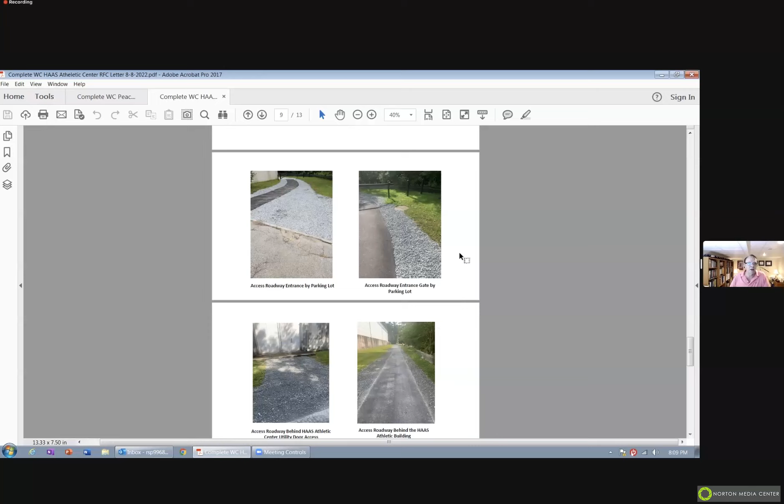Go back to the plan here. So we would like a certificate of compliance. The work's been done, and we'd like to close it out.

So, key question to John: are you happy with it? With all of it? Stabilization is complete. I'm happy. All right, so I think we can consider a motion for a full certificate of compliance, I'm assuming.

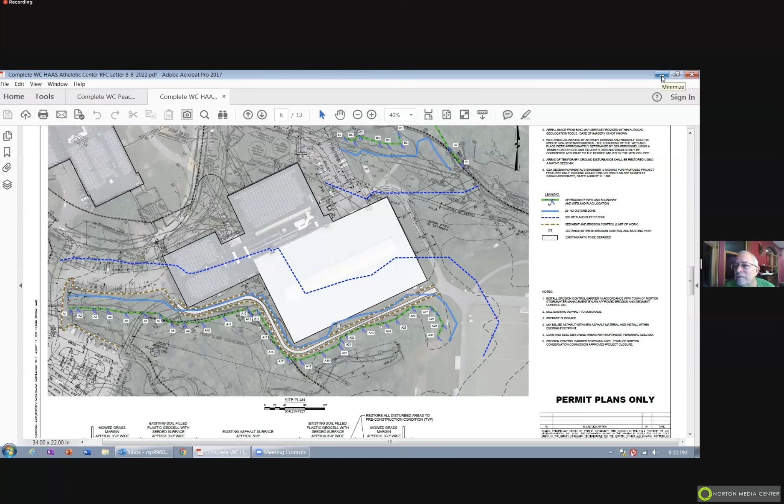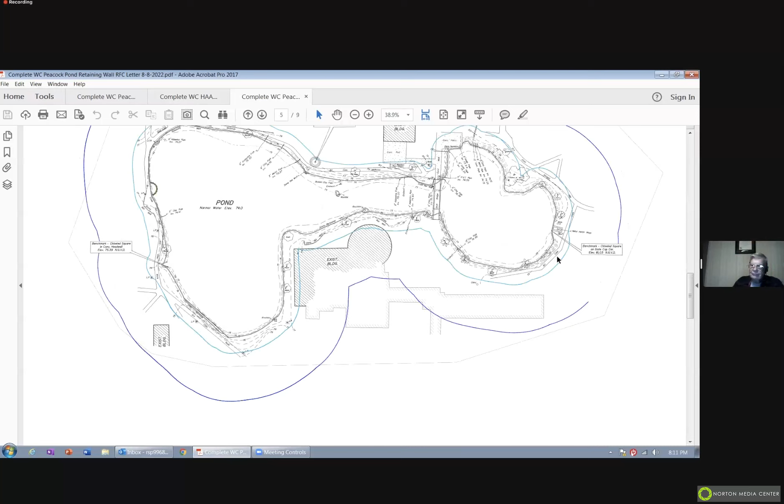For file number 250-1062, someone wants to make that motion? So moved. So we had a motion made by Dan and Ron. Was that a second? Yes. Okay, seconded by Ron for full certificate of compliance for file number 250-1062. So again, roll call vote starting with Tama and Mark. Aye. And Ron and Carrie. Aye. And Dan? Aye. And I'll throw in an aye.

So that motion carries. And we have a request for an extension, also file number 250-1016, Wheaton College, with regard to the repair of a wall around Peacock Pond. So do you guys have any comments on where that project is?

Yep, I have a map shown up here, the overview plan, and it's this wall on the right. The work was completed, but we would like to get an extension because some of the mortar that was used in the mix, for whatever reasons, didn't cure or take correctly. So Craig and I have been brainstorming a little bit as to what we can do to improve it.

And that is the reason why we'd like some more time to complete the work the way it was intended. I think the contractor did masonry work according to what he thought should be done. But if you take a look at it, you can see that some of the mortar needs some work and needs some improvement.

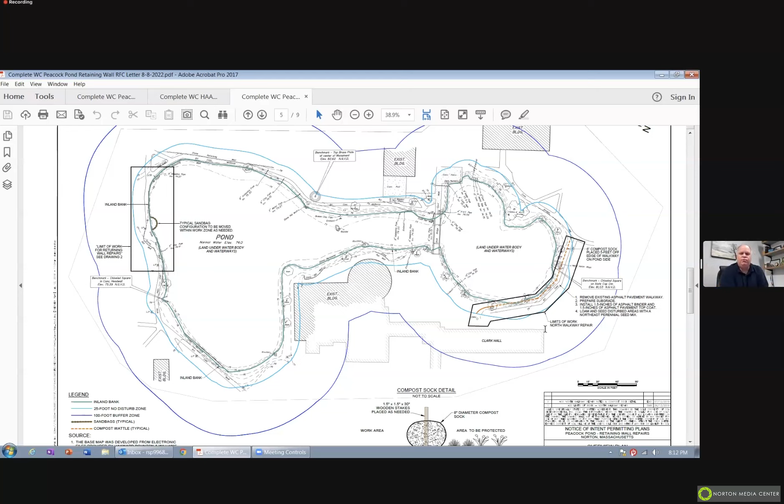And that's the basis for us asking for some more time. Craig, you want to add anything to that? Just that it's in pretty rough shape. We're trying to make some temporary repairs before the winter hits, and then in the spring probably try and do something a little bit more permanent, which is again the reason for the extension.

Our current goal is to follow the exact order of conditions that we had in the first place. All the protections would be the same. It's all about the timing now. So, John, I'm assuming this is fairly non-controversial - a year or 2 years? What kind of extension are we looking for?

I had put in a request for 3 years because I envisioned probably in the spring reaching out, having this thing completely re-engineered. But I will accept whatever the commission chooses. 1 year is fine with me at the moment.

John, any comment? Yeah, they can ask for an extension and then extend it again if they need more time. We can do a 1 year, 2 year, or 3 year, it's up to what the commission wants. But if you're looking at potential reconfiguration, whether minor or major change, we'd have to take a look at whether an amended order is going to be needed.

So I'd say we go with a 1 year extension for now. And if they can do it with the same design and everything, then that's good. If they need to come back, then they'll come back. Agreed. Thank you.

All right, I'm looking for a motion then. I'll make a motion to extend file 250-1016 for 1 year, as suggested by our conservation director. Motion made by Dan, and Ron, you had your mic. Yes. That's a second? Okay, so again, a roll call vote for a motion for extension for 1 year, starting with Mark and Tama.

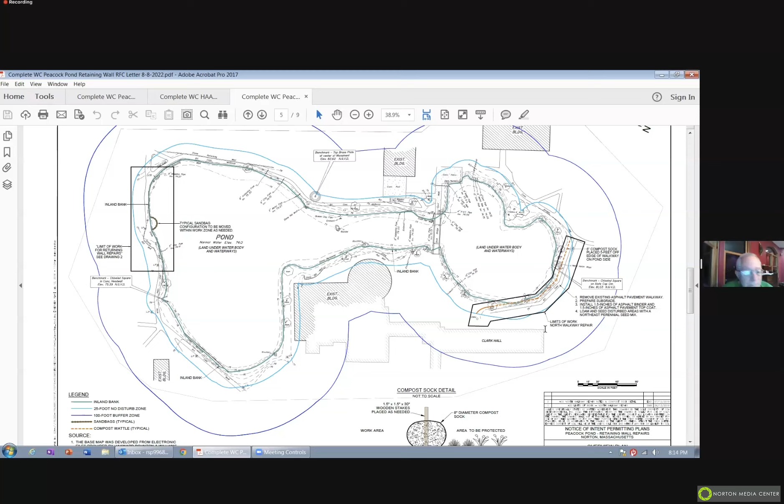Aye. Aye. And Ron and Carrie. Aye. Aye. And Dan? Aye. And I'll throw in an aye. So thank you, guys. Thank you, everyone.

Thank you. Our next item is draft minutes of August 8th. And we had a full board on that meeting. I didn't see anything that stood out. Anyone have any comments about that?

I had one. Yeah, go ahead, Tama. It was under C, file number 250-1108, 0 Hill Street. The fourth sentence from the end is just like a fragment. It kind of describes a person, but doesn't really explain anything else. Okay, I'll fix that. Thanks.

Am I still on? Yes, you are. Just two very small things. One is page 4, the very top line. This might have even been what Tama was talking about, but Michael mentions that blank got rid of the open basin. That's also on 1108, top of page 4. I don't know if I have different pages, but no, that's there, yeah. And so maybe it should be he or whatever or someone. Yeah, I'll fix that.